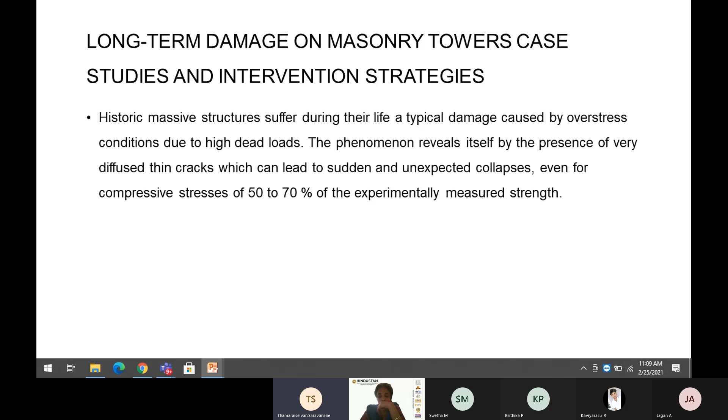Masonry towers case study and the intervention strategies. Historical massive structures suffer during their life a typical damage caused by overstress condition due to high dead loads. A phenomenon reveals itself by the presence of very thin cracks, which can lead to the sudden or unexpected collapse, even for compressive stress of 50 to 70% of the experimentally measured strength.

Case study: Saint Giustina Bell Tower in Padova. The bell tower of Giustina Basilica in Padova is a three-leaf masonry structure 70 meters tall, built in the 13th century up to 40 meters and raised up to the current height in the 17th century.

This event was responsible for the overloading conditions of the lowest and poorer part of the structure, characterized by a serious crack pattern, mainly concentrated at the corners. Moreover, the external walls with a thickness of one brick, hiding the column stripes that decorate the external face of the bell tower walls, were lately added to the building without a good connection to the old masonries.

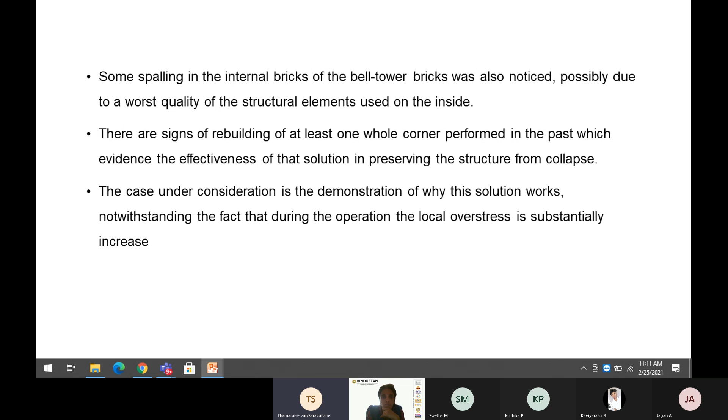Some spalling in the internal bricks of the bell tower was also noticed, possibly due to a worse quality of the structural elements used on the inside. These are the signs of the rebuilding of at least one whole corner performed in the past, which evidence the effectiveness of the solution in preventing the structure from collapse. The case under consideration is the demonstration of why this solution works, notwithstanding the fact that during the operation the local overstress is increasing.

The damage in fact involves basically in its first phase the external leaf, where the masonry is stiffer, and due to the availability of a large resisting area on the usual thick section, which allows to execute the intervention in safety conditions. The structure is able to accept during the time stress redistribution both for damage and rebuilding operations. Local rebuilding was, for such reason, extensively used during the works to improve the safe condition of the towers, especially in the lower and less visible parts of the construction.

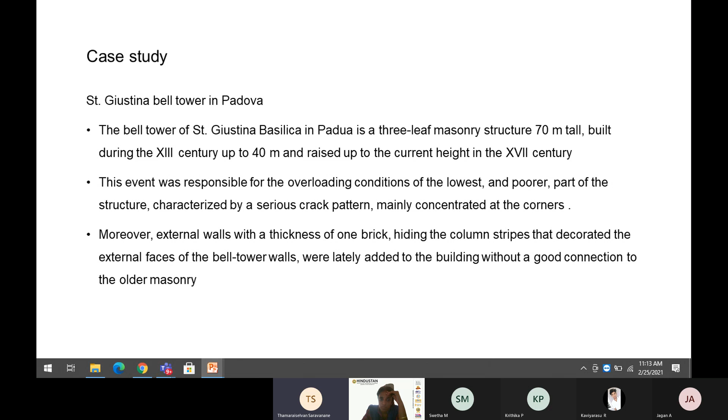Where did you get this from? Can I have the original document? I will get it, ma'am, later. I'll send you, ma'am. Because I'm not able to. It feels like something is missing. Okay, ma'am, I'll send it, ma'am.

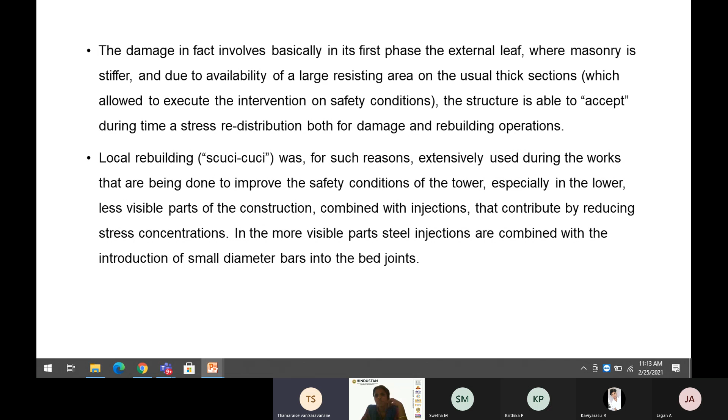Next one. San Giovanni Battista Bell Tower in Monza. It is the bell tower of the Cathedral of Monza, a 16th century building made of solid bricks, and the masonry walls show large passing-through vertical, potentially dangerous cracks on some particularly weakened portions of the west and east side, and these are slowly but continuously opening, as given by monitoring activity since 1927.

Wide cracks are also present in the corners of the building up to 30 meters. Furthermore, a damaged zone at a height of 11 to 25 meters with a multitude of very thin and diffuse vertical cracks is present.

Design of intervention was mainly aimed at providing an overall confining action of the masonry wall and limiting the dilation of the material. In this specific case, due to the large diffusion of the crack patterns, 11 by 9.5 meters, extending in a wall depth of 45 centimeters over 140 centimeters, reconstructing the wall or use of floor tie rods in order to reduce the lateral deformation of the structure was inapplicable.

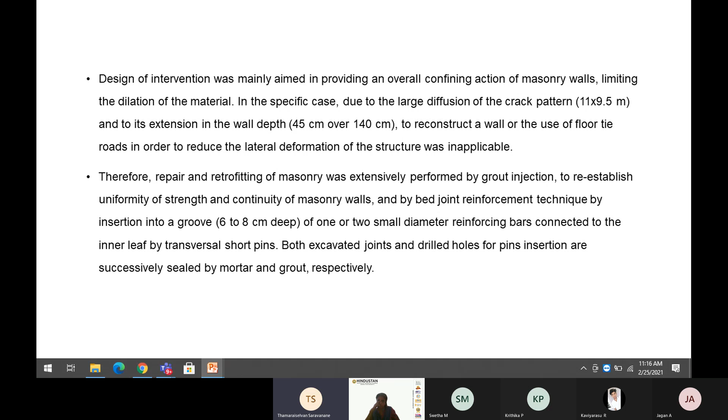Therefore, the repair and retrofitting of masonry were extensively performed by grout injection to re-establish the uniformity of the strength and continuity of the masonry wall, and by bed joints reinforcement technology, by insertion into a groove of 6 to 8 centimeter depth of 1 or 2 small diameter reinforcing bars, connected to the inner leaf by transversal short pins. Both the excavation and drill holes for pins insertion are successively sealed by mortar and grout respectively.

Conclusion. Control of time-dependent behavior of masonry towers is an urgent problem to face in order to preserve the last examples which still resist in heritage, and at the same time to improve the safety of historical centers where those structures stand, often in a hazardous condition. These two case studies here presented are representative of the most typical conditions of damage detectable: cracking concentrated on the external layers or diffused in large portions of the wall.

Rebuilding of the damaged portion has demonstrated its validity in the past, as it is able to improve the material properties. Nevertheless, the intervention is often required over a large zone to be effective. Therefore, it is characterized by a high degree of obtrusiveness.

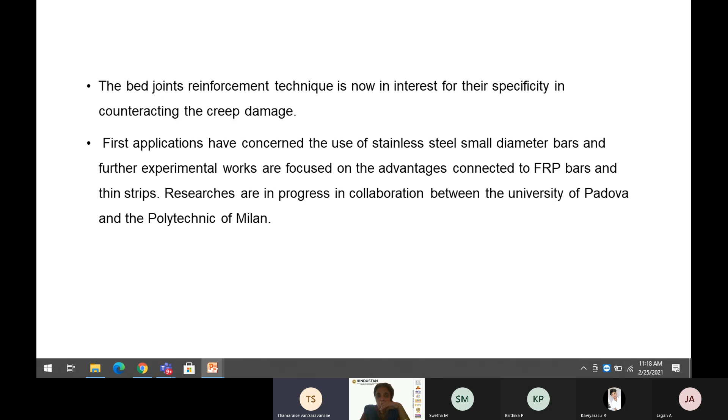The bed joints reinforcement technique is now of interest specifically in counteracting the creep damage. The first applications concentrated on the use of stainless steel small diameter bars, and further experimental works focus on the advantages connected to FRP bars and thin strips. Research is in progress in collaboration between the University of Padova and the Polytechnic of Milan.

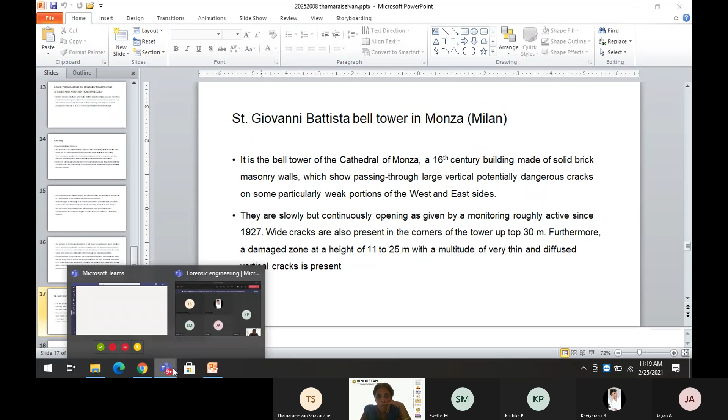Let me just find out what this case study is and I'll get back to you. So in the meantime, you people just take up that assignment and complete it now, or have you done it? Okay. Do it now.